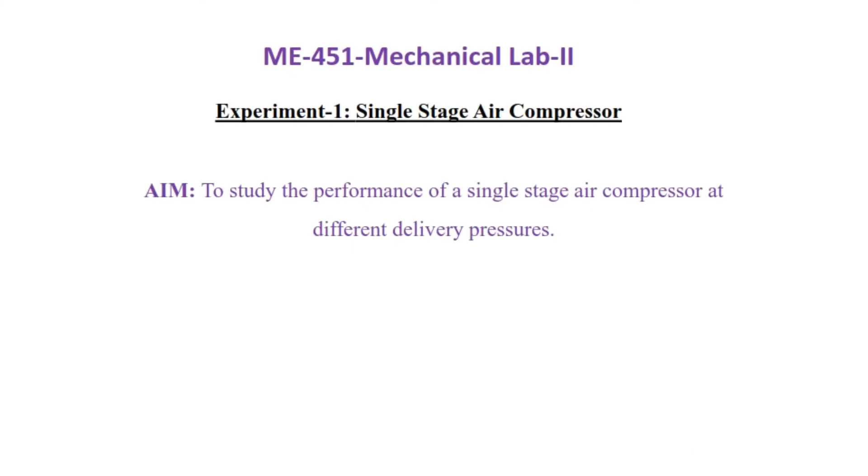Today we are going to do an experiment on reciprocating compressor. We will find out the performance of a single stage reciprocating compressor. This is the compressor we are going to do the experiment on, and I'll show you how to start it, what procedures should be followed before starting, how to take the different readings, and then use those readings to find out volumetric efficiency, isothermal efficiency, and overall efficiency.

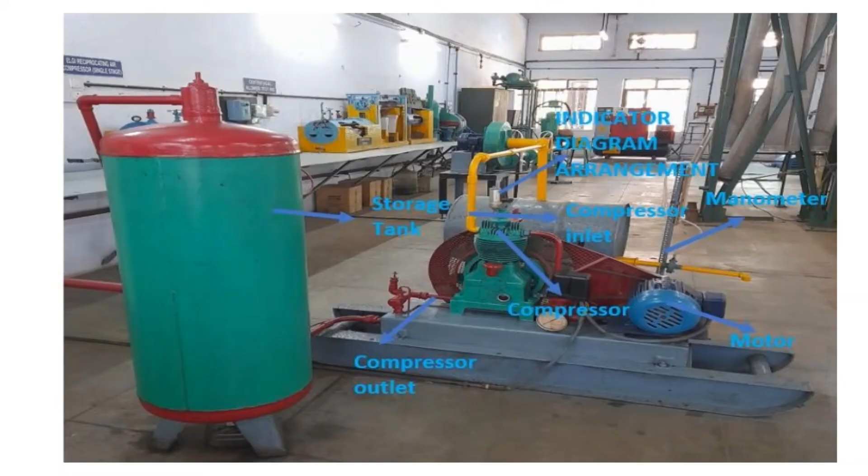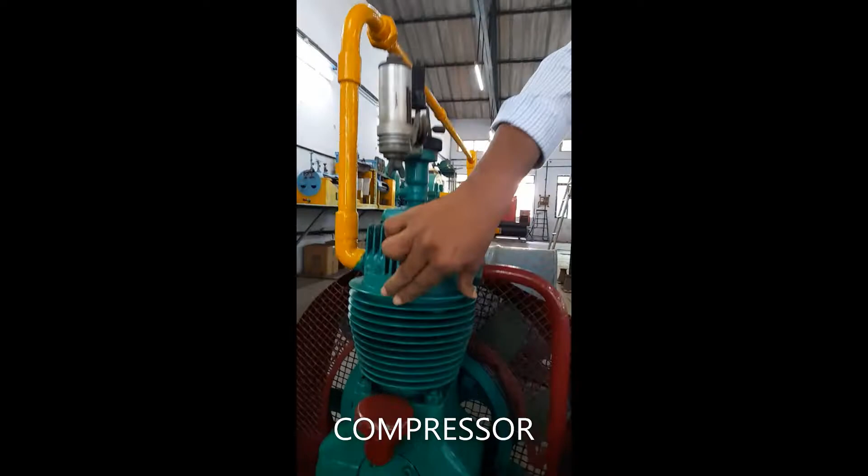Now I'll just show you. This is the compressor part. Before starting you should check whether lubricating oil is there or not in the level. This is a motor belt driven compressor. You can see this, everything is free.

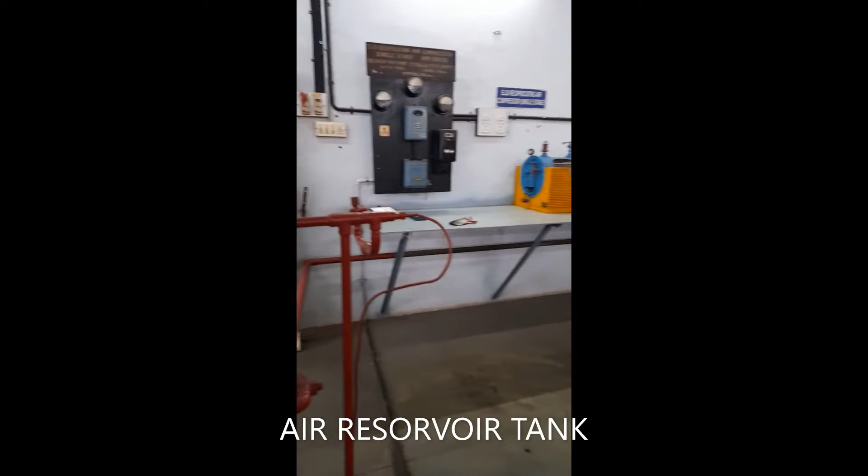And then you have to see the pressure gauge here. This will show you the discharge pressure of the cylinder. This is the reservoir. So air is coming from here and filling this reservoir.

We find out the performance at different delivery pressures: 2 bar, 4 bar, 6 bar and 8 bar. We have to note down the readings and do the performance analysis. Now I will tell you what are the different readings we need to take here.

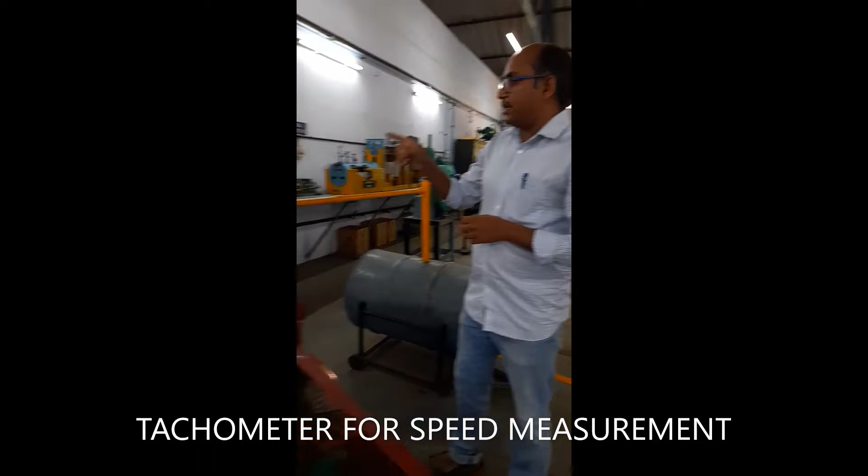We have to take RPM, the speed of this compressor. For that we use a tachometer. Coming to this side, we put the tachometer on the shaft and we will get the readings.

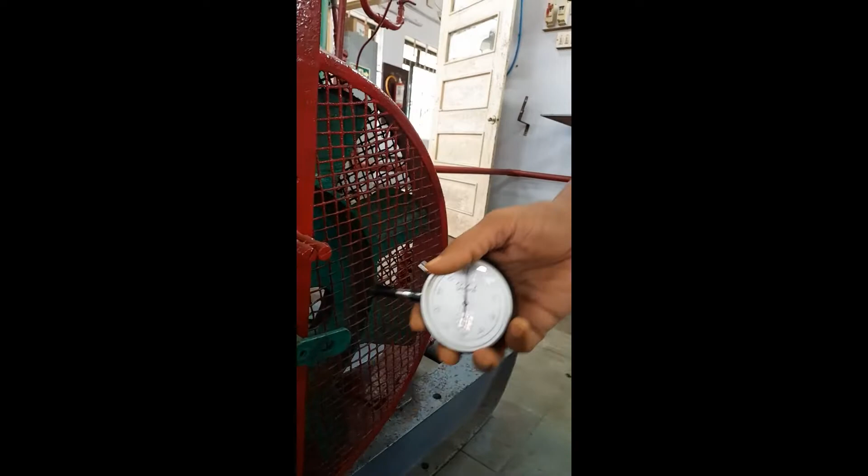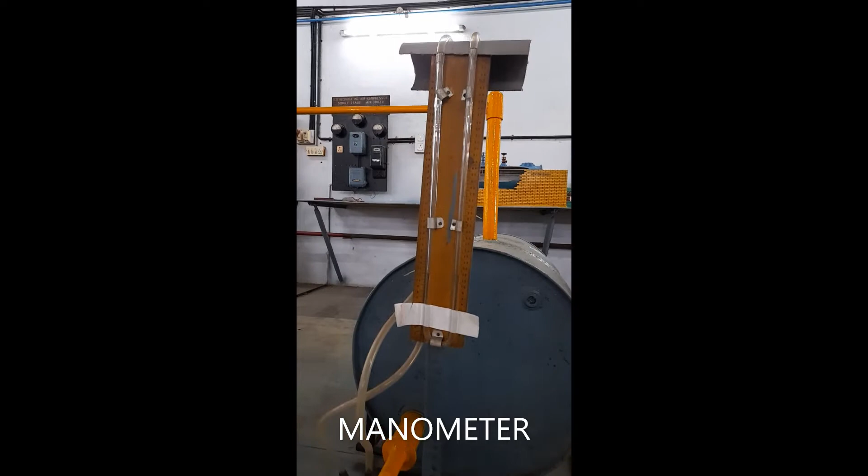We will start the compressor and I will show you. This is the tachometer. We also need to find out the volume flow rate, air flow rate. We have an orifice meter here, and you have to take the readings of this manometer and note down the delta P, pressure difference. Based on that you can find out the air flow rate, volume flow rate.

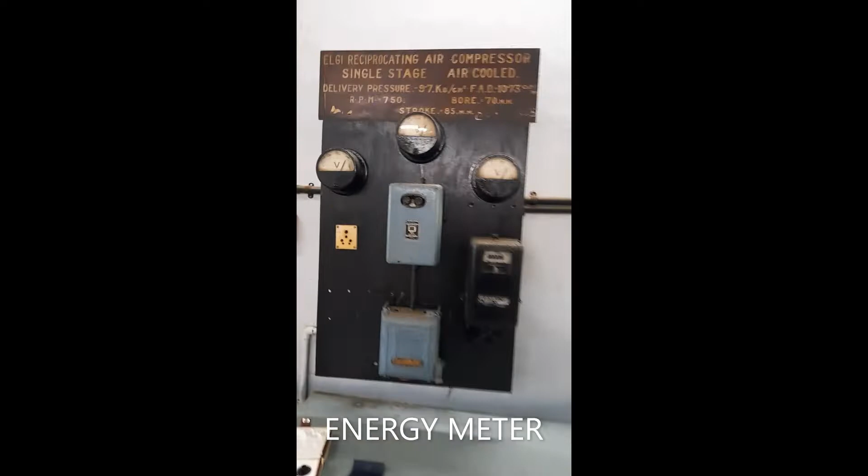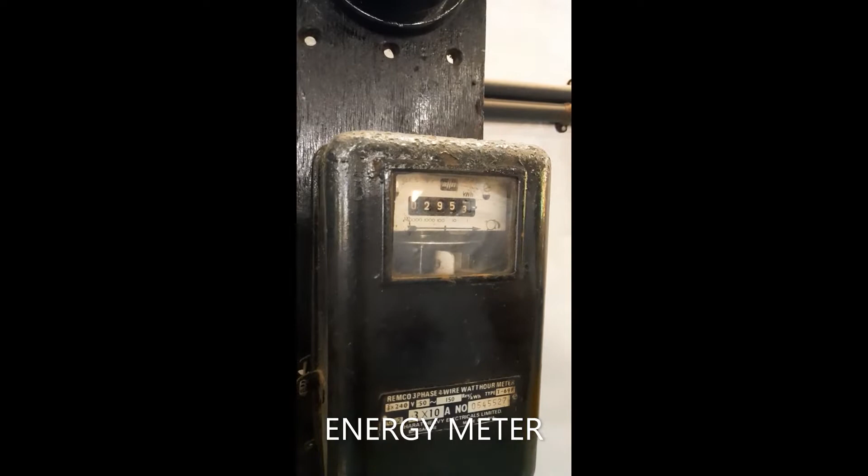Another thing: how much power the reciprocating compressor consumes, we can find out from the watt meter or power meter. It is here. We have to note down the revolutions - when we start the compressor this will start rotating, and for 10 seconds we note how many revolutions there are. This will give you the power.

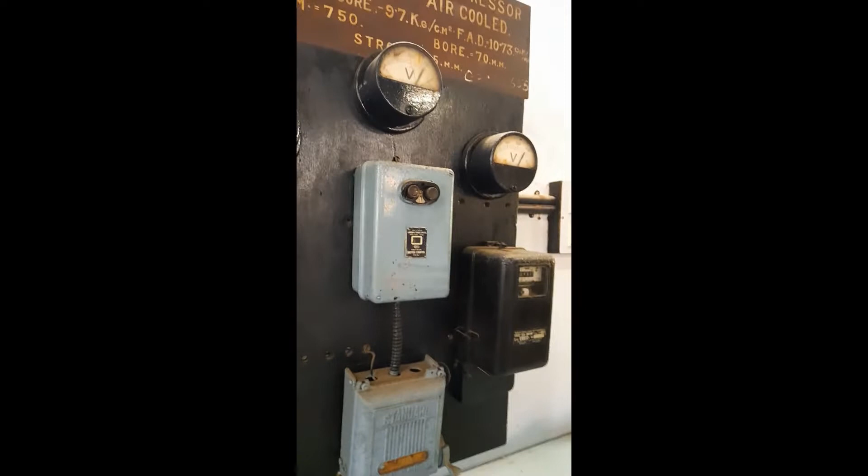Now let us start this compressor, and I'll show you how to take the readings. So I am starting here. Before starting you must know how to stop it - this is a very important part. This is the stop button, and this is the start button. So if I start it, I am doing it now, you can see.

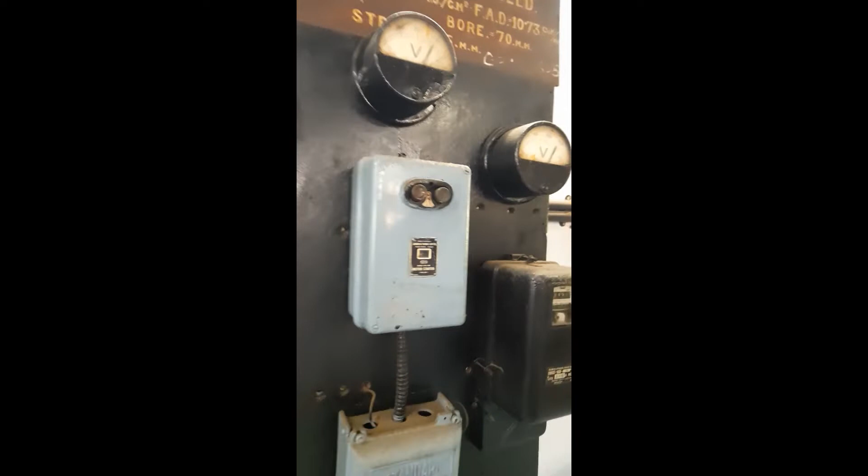You can show here. So this is the compressor starting.

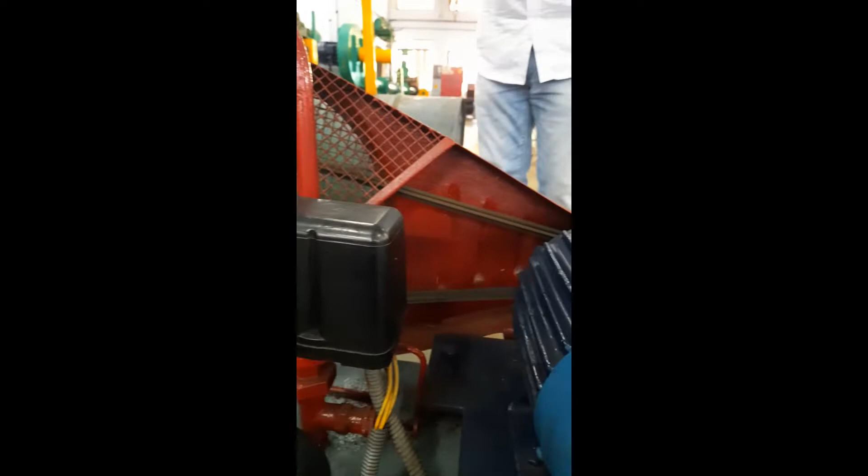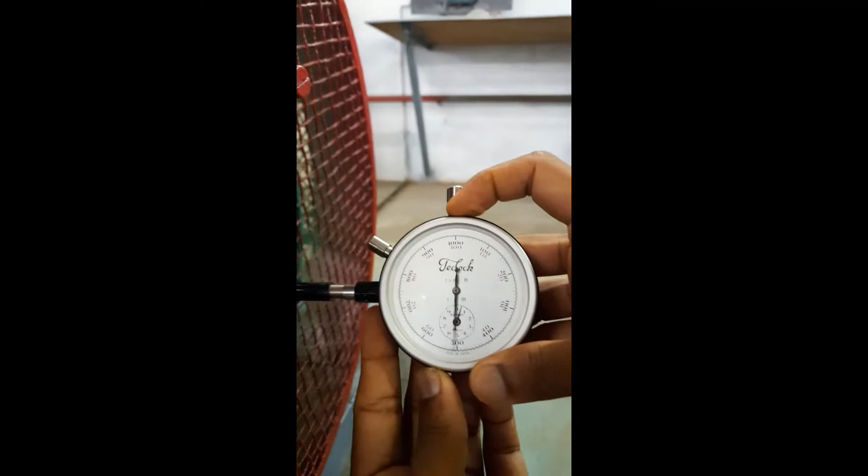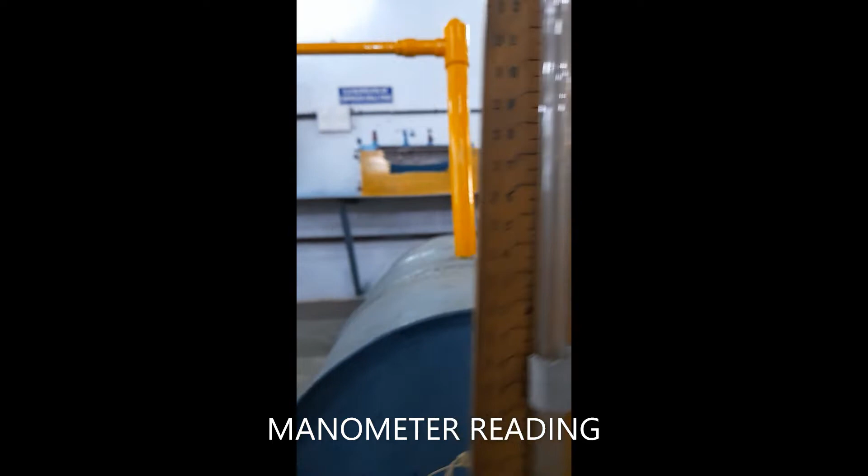Now I will show you how to measure the RPM. It is around 700 RPM. Now the manometer reading - you can see the difference here. One point is here, another is here inside. It is here, another one is here. You can see from the side. So this difference you have to note down.

Now I have switched off. You have to run it for quite a duration, maybe 20-30 minutes, to get the required pressure. We need to first take a reading at 0 pressure of this cylinder, then at 2 bar pressure when it reaches that, take the readings. So at different pressures - 2, 4, 6, 8 - you should take readings.

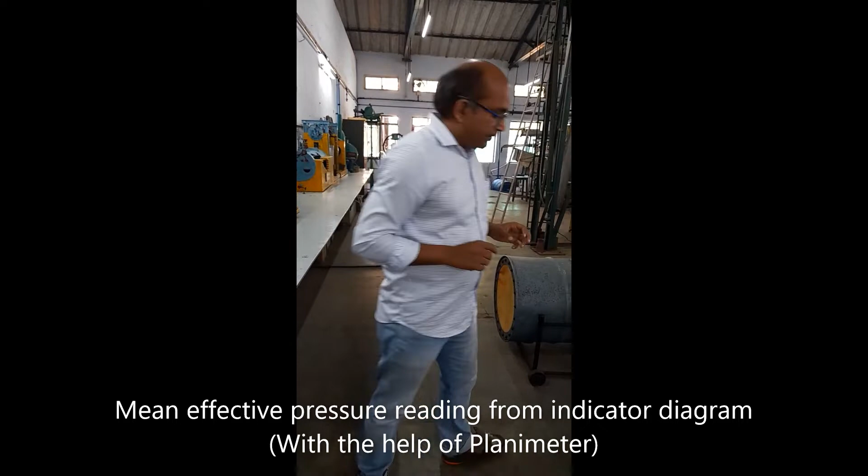Now, how much power consumption is there, that we know from the watt meter. And if you want to find out efficiency, you need the indicator diagram - indicated power, how much is there inside the cylinder. We have that, but this thing is not working now. So earlier, when it was working, we recorded it, and that area we have to find out.

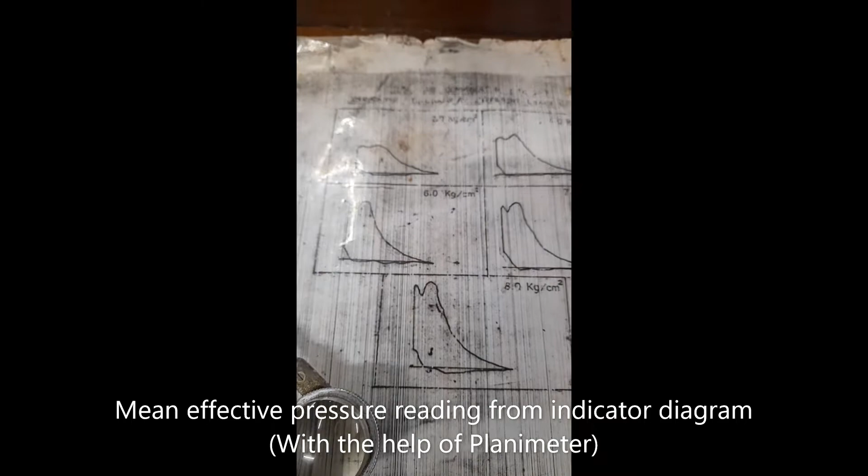I will show you here how to do that using a planimeter. This is the planimeter, and these readings are the old readings at different bar: 2 bar pressure, 4 bar pressure, 6 bar pressure - 6 kg per centimeter square, 7 kg per centimeter square and 8 kg per centimeter square. So at 2, 4, 6 and 8 we should do the experiment and find out the performance.

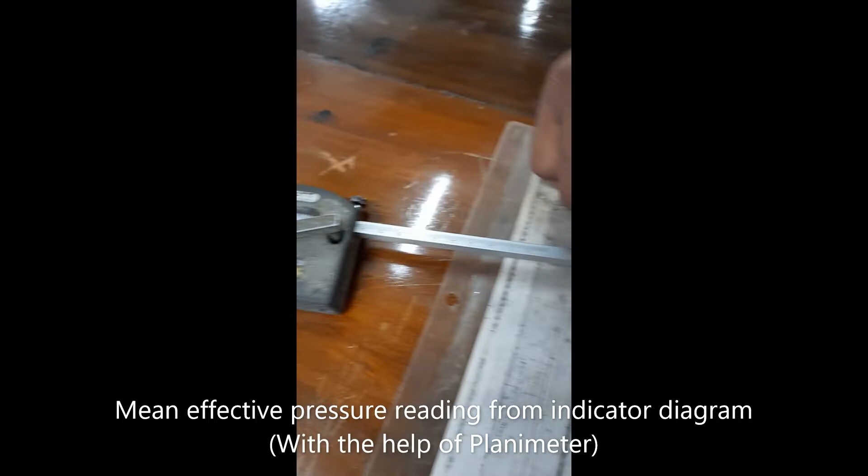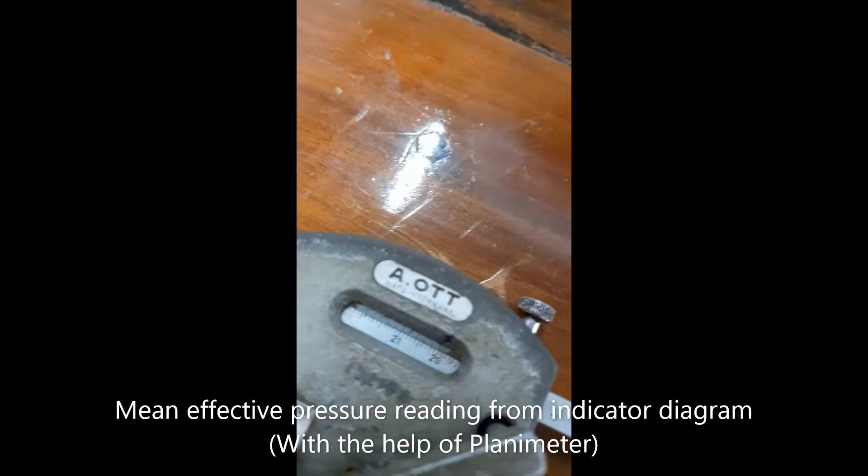For these things, this is a planimeter, the mechanical type planimeter. You have to fix it and move it according to the periphery of the graph, and you will get the readings - that area you will find out. You might have done this planimeter reading in an earlier semester also.

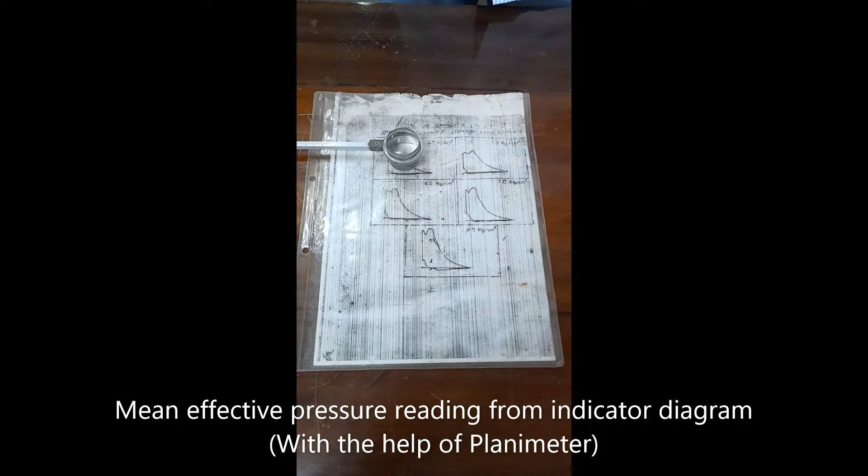So with this planimeter and a spring constant, you can find out the indicated power. This way you will find out the performance of this compressor. I will share all the details and data required, and based on that you have to calculate and submit the graphs, whatever the related things are there. Thank you.

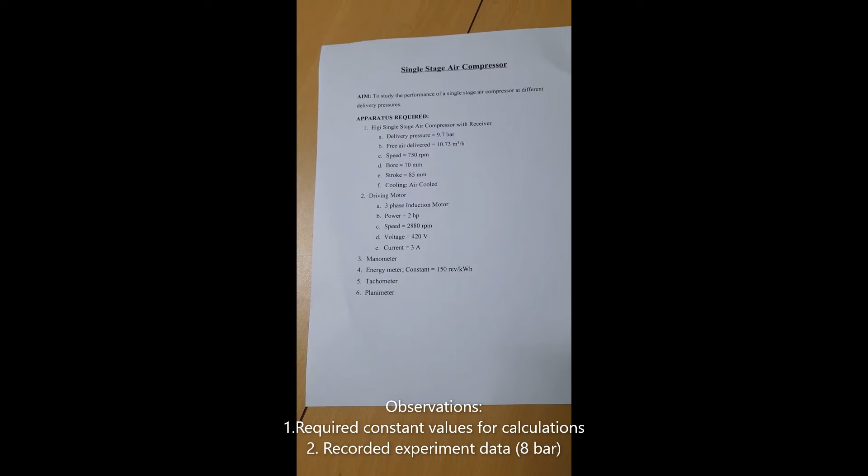Now let's move on to the calculation part of the single stage air compressor. For that we need some data.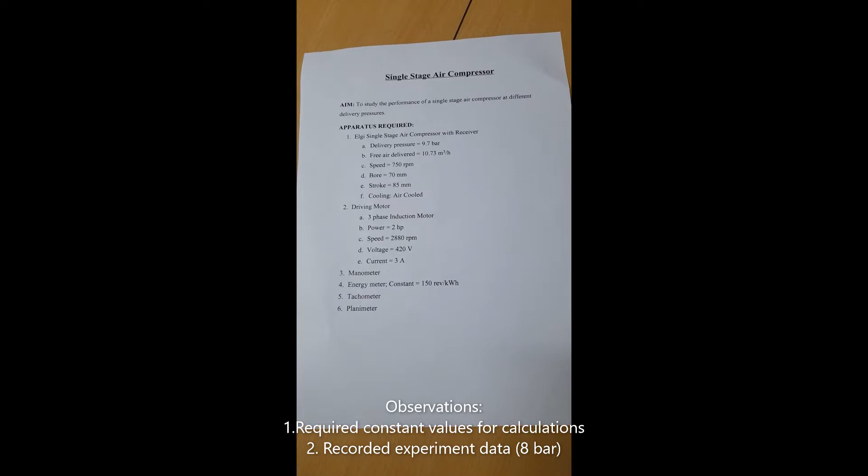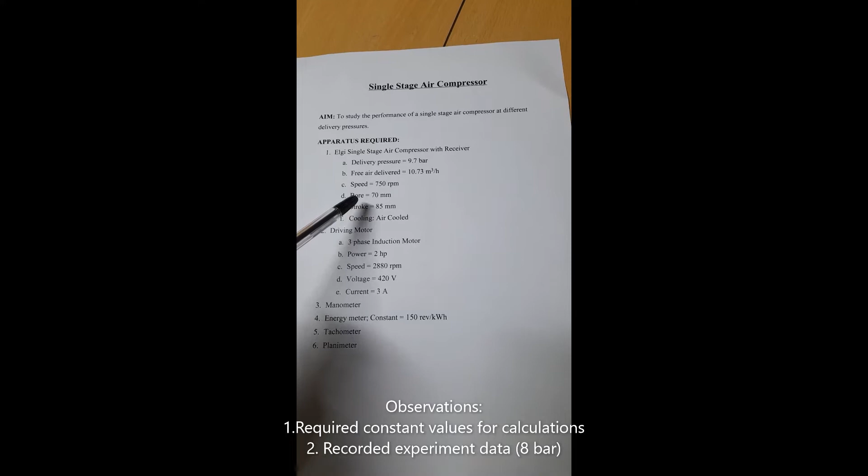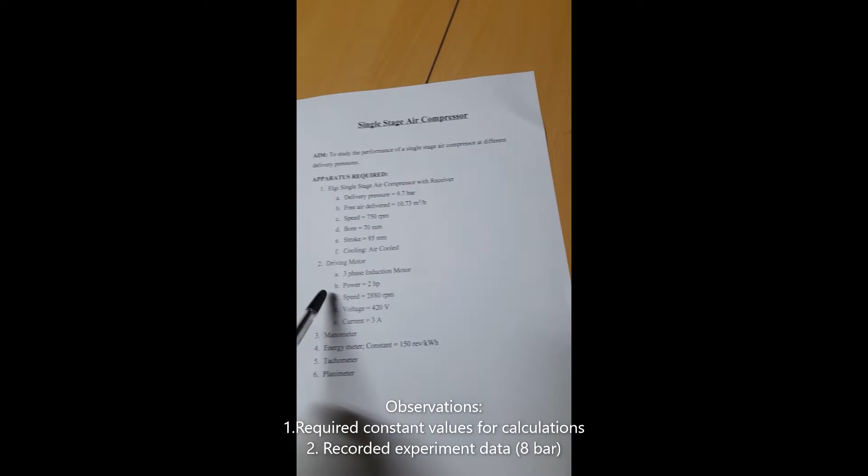See, the apparatus required can be seen here for the single stage compressor, the Elgi single stage air compressor. The specification has been given, that is speed. We need speed, bore and stroke length to calculate the mean effective pressure. Here is the specification related to the driving motor, and here is some energy meter constant given.

Some observations and some constants have been given. These constants will be helpful for calculating the parameters in the calculation part.

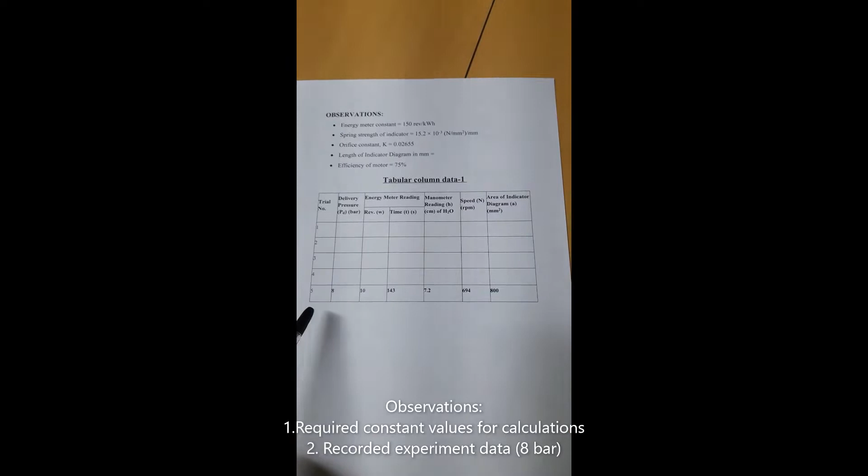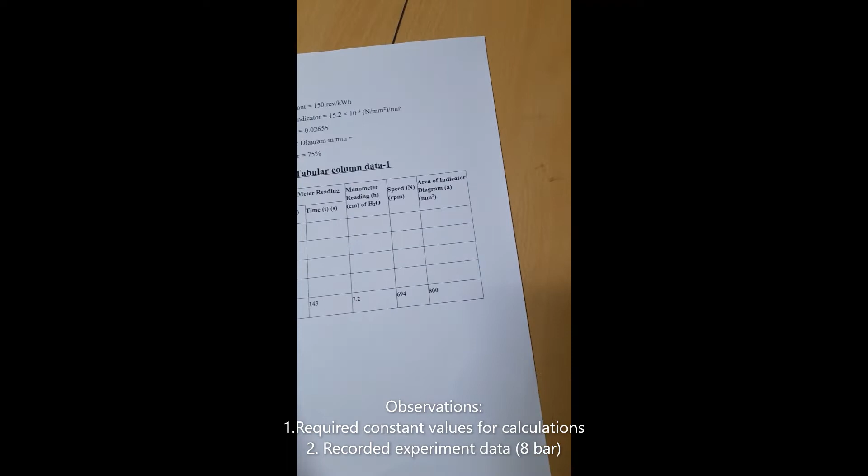So you can see this is the tabular column. We have tabulated the 8 bar data. The energy meter reading for 10 revolutions will take 143 seconds, and the manometer reading will be 7.2 centimeters. The speed at this particular 8 bar pressure is 694 rpm, and the area of the indicator diagram for this 8 bar is 800 millimeter square.

First we need to calculate the input power. This is the formula given: 24 into the number of revolutions, that is 10, divided by the time taken, gives the motor power.

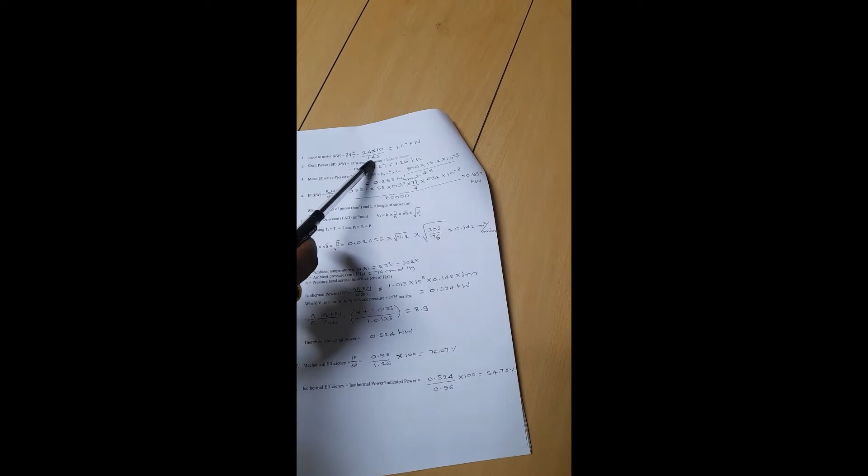Then we can go for shaft power. The efficiency of the motor has been given, so using the efficiency of the motor and input motor power, you will get the shaft power.

Then we move on to the mean effective pressure. With the help of the indicator diagram, we can calculate the mean effective pressure. This is the formula: area of the indicator diagram and length of the indicator diagram. This L is there, and this is the spring constant, which is in the observation part. So you will get the mean effective pressure.

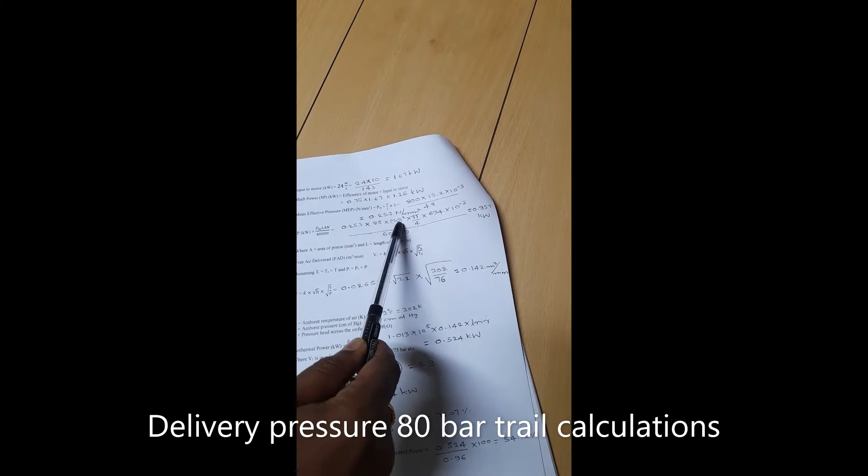Then move on to indicated power. This will be the formula, PLAN by 60. This is the mean effective pressure, the length, and this will be the area. Then this will be the rpm. You will get the indicated power.

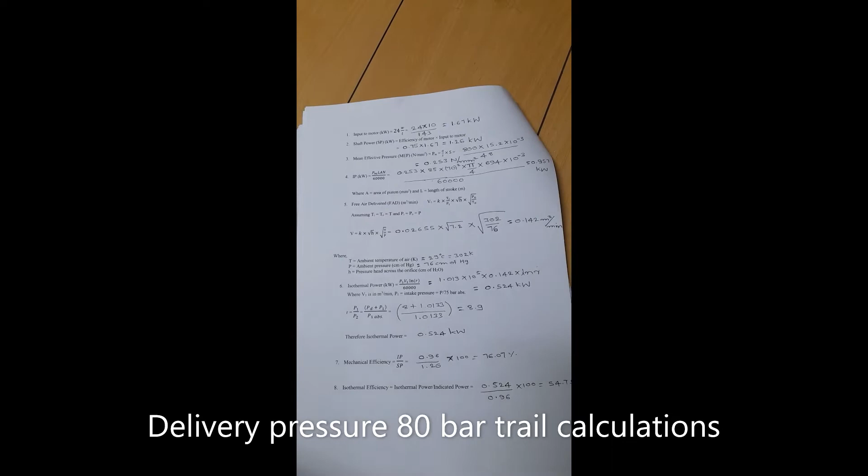Then move on to what amount of air enters into the compressor, that will be the free air delivery. This is the formula to calculate the free air delivery. K is the constant given, H is the manometric reading, and T is the atmospheric temperature, this is the pressure in terms of mm or centimeter of Hg.

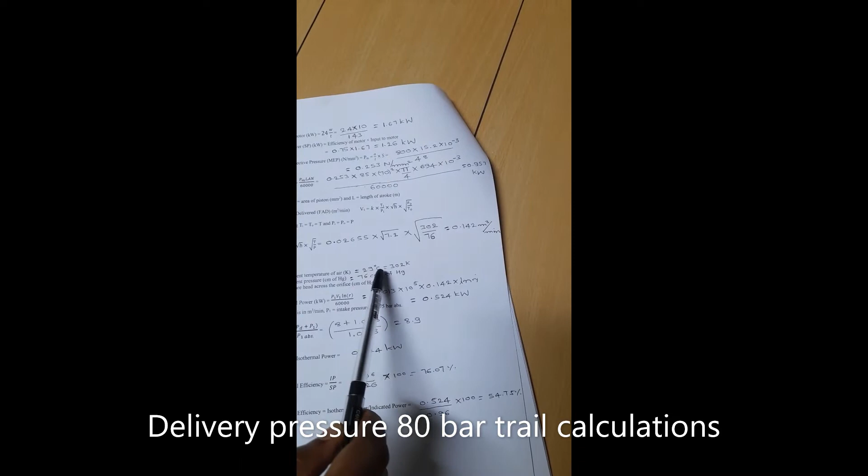That is 302, you can see 302, that is 29 degrees centigrade converted to Kelvin. So ambient pressure in centimeter of Hg is 76. You will get the free air delivery.

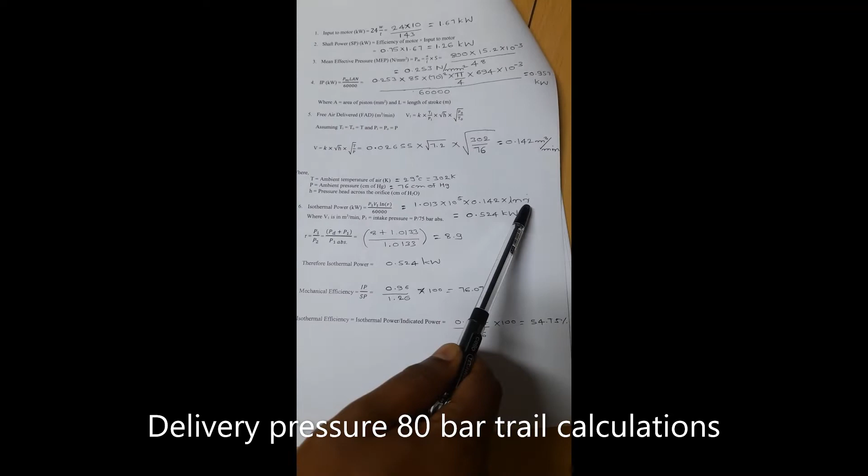Then move on to calculate the isothermal power. This is the formula to calculate the isothermal power. P1 is 1 atmospheric pressure, and V is the free air delivery calculated previously, so you can substitute it here along with the ln of R. This R value comes from the formula to calculate the pressure ratio, which gives 8.9. Just substitute here and you will get the isothermal power.

Then comes mechanical efficiency, that is indicated power by shaft power. Substitute the values and you will get the mechanical efficiency.

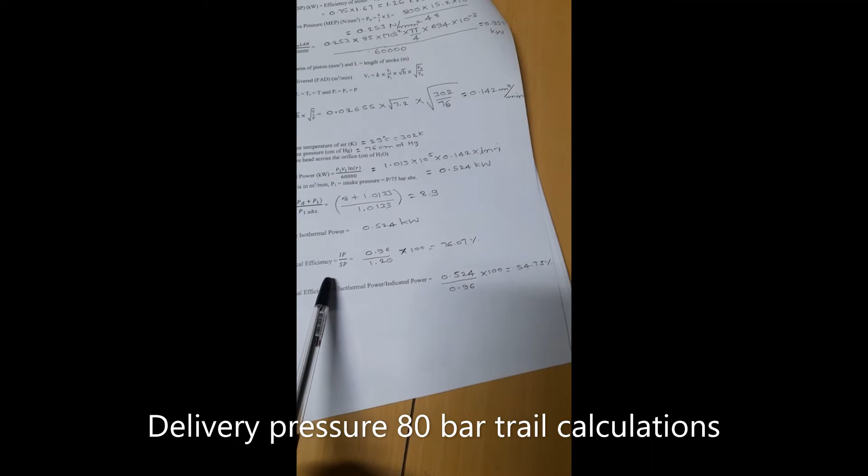Now comes isothermal efficiency, isothermal power by indicated power, you will get the isothermal efficiency. And overall efficiency, which is the ratio of isothermal power by shaft power. Just substitute the value and you will get the overall efficiency.

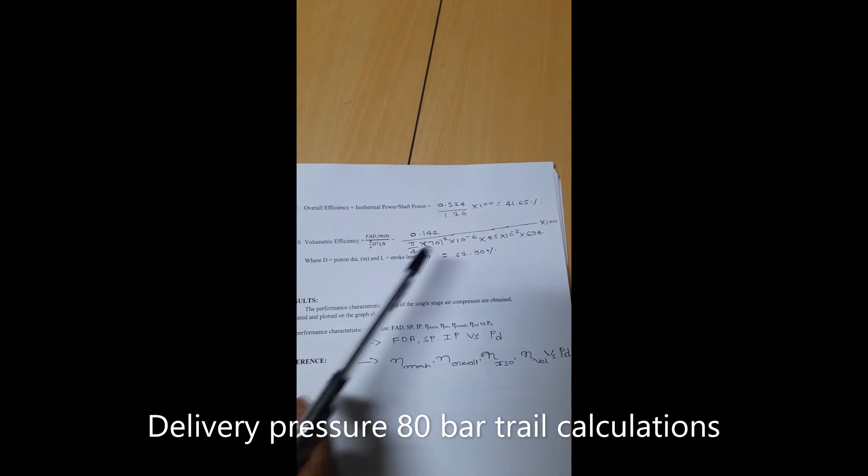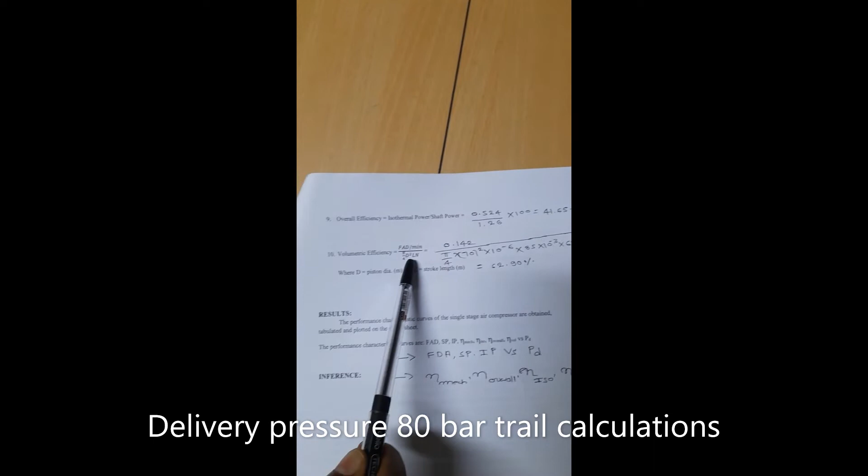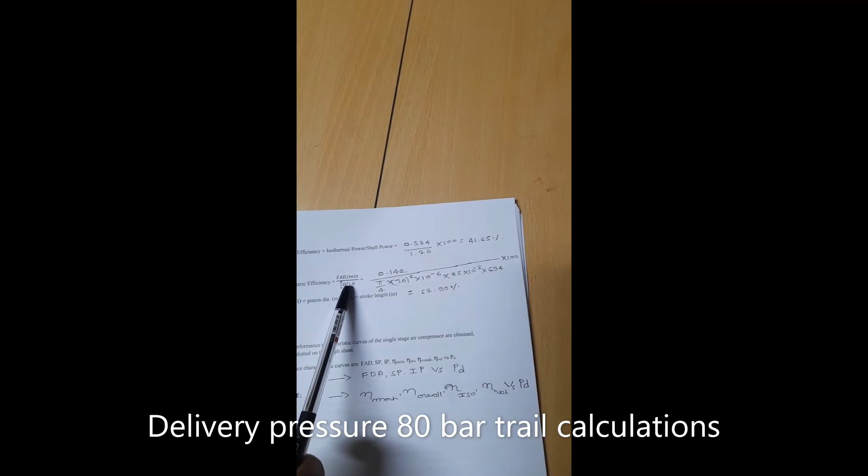Now comes volumetric efficiency, that is free air delivery by the cylinder volume in terms of rotation. You will get the volumetric efficiency. The D and L values here are the diameter of the piston and the stroke length. Just substitute the values and you will get the volumetric efficiency.

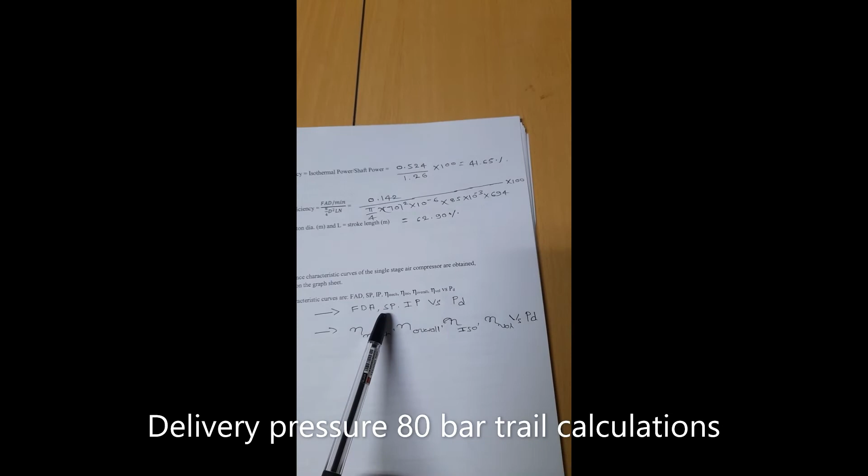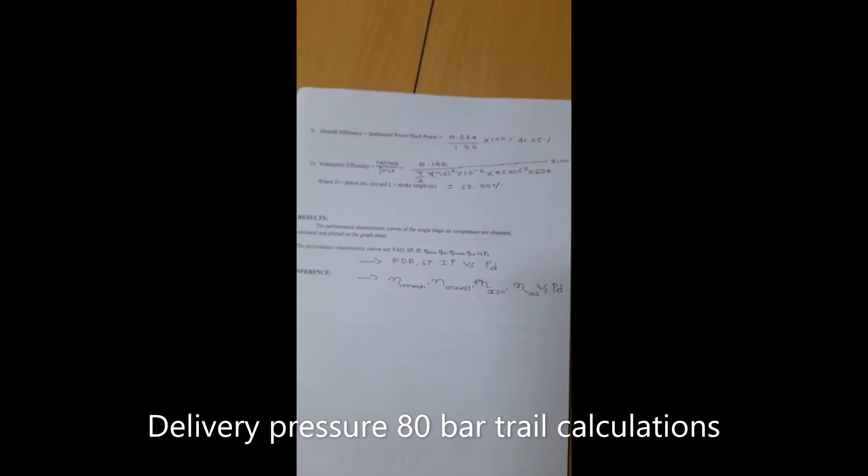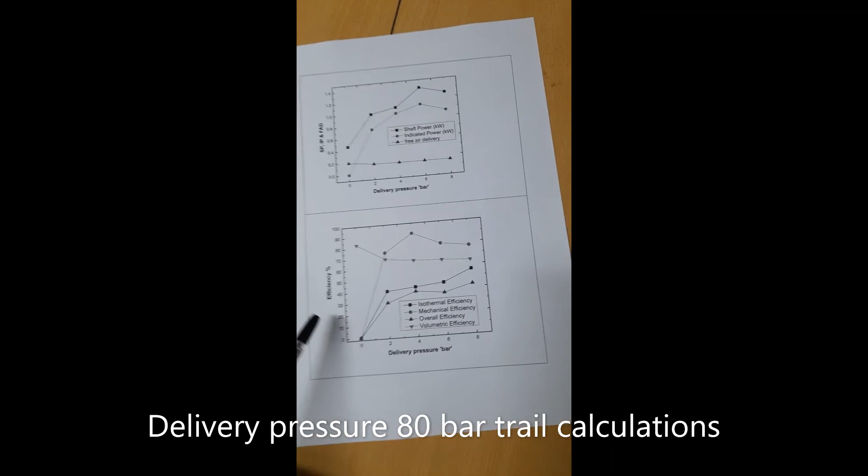In the results, we need to show the performance characteristic curves, two graphs. One will be free air delivery, shaft power and indicated power versus delivery pressure, and the other will be efficiencies versus delivery pressure. These are the graphs, shaft power, indicated power and free air delivery versus delivery pressure, and efficiencies versus delivery pressure. Like this, we need to draw the performance characteristics in terms of power and efficiencies in two separate graphs. Thank you.